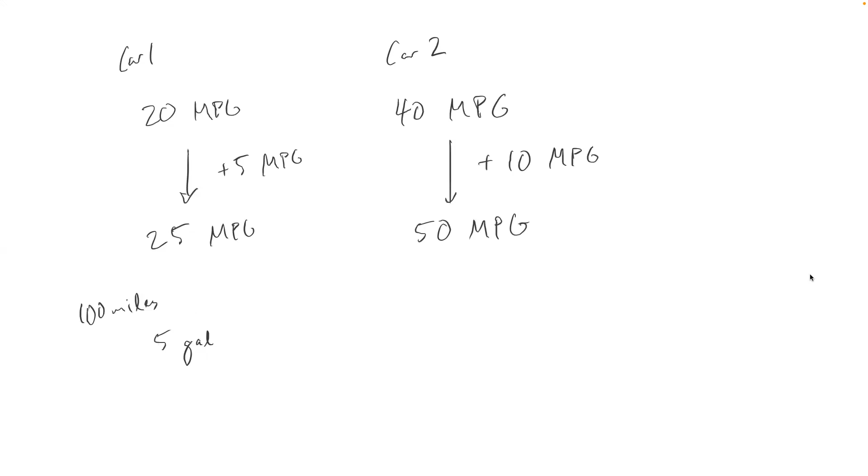Yeah, so okay, if I travel 100 miles in car 1, then it would be 5 gallons. If I traveled 100 miles in the updated version, it would be 4 gallons. So I would save 1 gallon of gas. If I went 100 miles in a 40 mpg car, it would be 2.5 gallons. And then if I went 100 miles in a 50 mpg car, it would be 2 gallons. So I would actually save 0.5 gallons.

Yeah. So what does this mean? This means switching from like a Honda Civic to a Toyota Prius is actually not as good as getting someone out of a Hummer into like a Ford F-150, right? The relative amount of emission savings from making an improvement at low MPGs is, in a very non-linear way, much better than getting someone from a good car to a really good car in terms of efficiency. So something to think about and relevant to this discussion, right?

As we think about the cars versus trucks discussion, in my mind, the efficiency and emissions requirements for trucks are substantially more important than the ones for cars. And all of this confusion, and actually people have looked at this too, asking people who are buying cars to do some of these calculations about how much money they're going to save and how much gas they're going to use. And even people who are very familiar with the field get these questions wrong all the time. And that's entirely a product of the fact that we use MPG instead of gallons per mile.

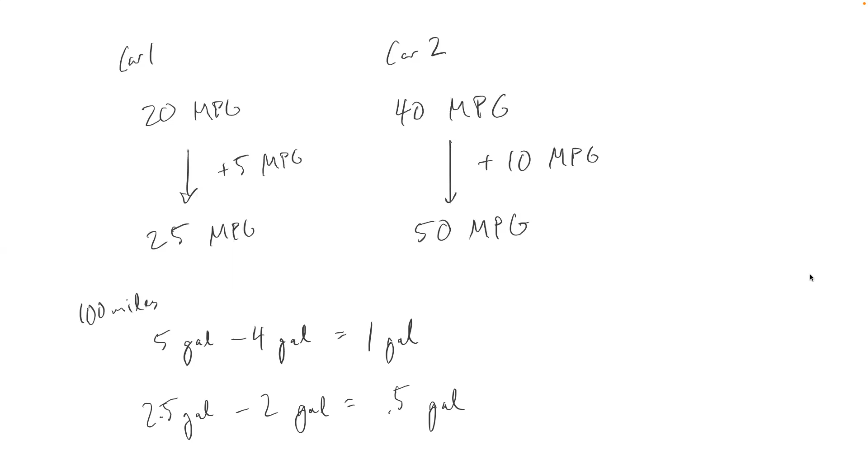Yeah. Is there a role for regulators in trying to make these numbers make more sense? I mean, is there legislation that says car makers need to advertise in gallons per mile rather than miles per gallon? No. No, yeah, it's too late for that.

But what I will say, they do try and make it easier. So in Monroney stickers, for example, which is a legislative, or is that a regulatory? No, it is a legislative requirement. So Monroney stickers, which are those pieces of paper that are plastered on the side of the car when you go to a car dealership, those are required to have certain content of information, including things like the gasoline savings in dollars, or the gasoline consumption, so that people don't have to try and figure it out themselves.

Is Europe's fuel efficiency standard in grams CO2? No. Would it be better to look in terms of carbon impacts for these things? Well, okay, wait. They have, EU. Sorry. Okay. I only said no because it's not a fuel efficiency standard; it's an emission standard. But they are the same thing, effectively. Grams CO2 per kilometer then? Yes.

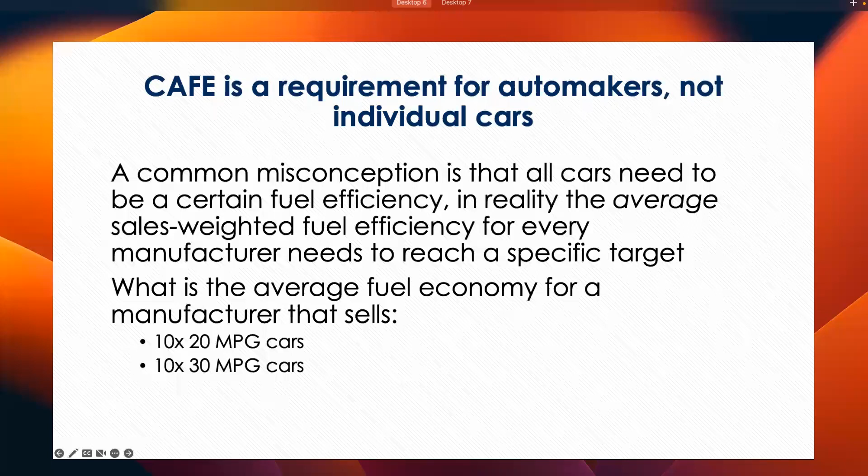Efficiency is reported typically as liters per 100 kilometers or liters per kilometer, depending on country. And then as far as regulation goes, the EU does have a set of emission standards, which is grams of CO2 per kilometer. So which would be better as a policy option if the target is carbon? It's not better or worse, right? They're exactly the same. There's a direct relationship between CO2 and MPG. So let me show you guys. If you're regulating car makers, but it makes more sense to do... Well, we're gonna get into this whole debate. Don't worry. We're gonna get there.

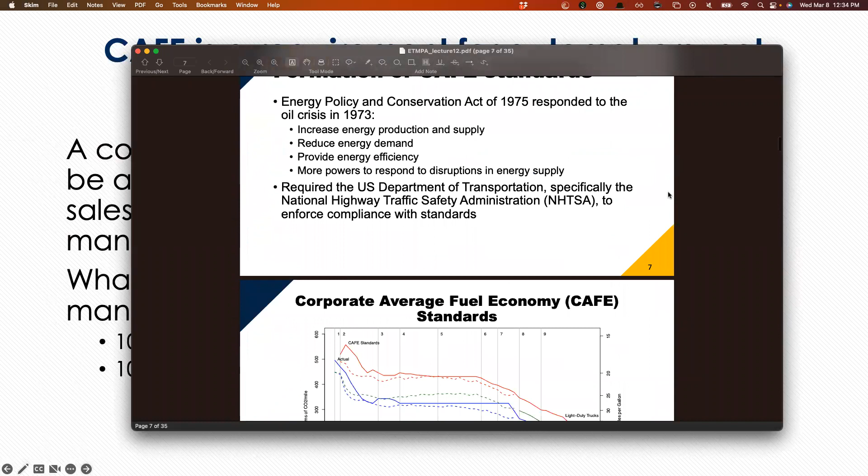So actually, I cut out, improperly, changed the whole meaning of the sentence. So this is my last year's lecture. I actually cut this out because it's a figure that I made a long time ago that's out of date. But okay, so this, yeah, because I made this in grad school, which was like a decade ago.

So you can see here, on this axis, it's grams of CO2 per mile, and on this axis is MPG, and there's a direct relationship between these two, right? So I usually say never have secondary axes unless there's an actual relationship. So in this case, it actually makes sense. And what you can see, here's this nonlinear part, right? The amount of emissions savings from 15 to 20 is the same as 20 to 30, which is the same as 30 up to 60, right? So that's why it looks like this is an inverse relationship.

This is what EVs... Well, EVs don't have an MPG, right, but you could say kilowatt... Well, okay, we're gonna get to that. Is it also non-linear as well? So EVs can be reported as kilowatt hours per mile, which would be the same as your energy over your consumption piece, or it can be miles per kilowatt hour. So I would love it if we took this opportunity to do kilowatt hours per mile, but it seems like we're reverting to miles per kilowatt hour for most things in the regulation. So we're staying with the MPG instead of GPM. Unfortunately, we had a chance, but yeah.

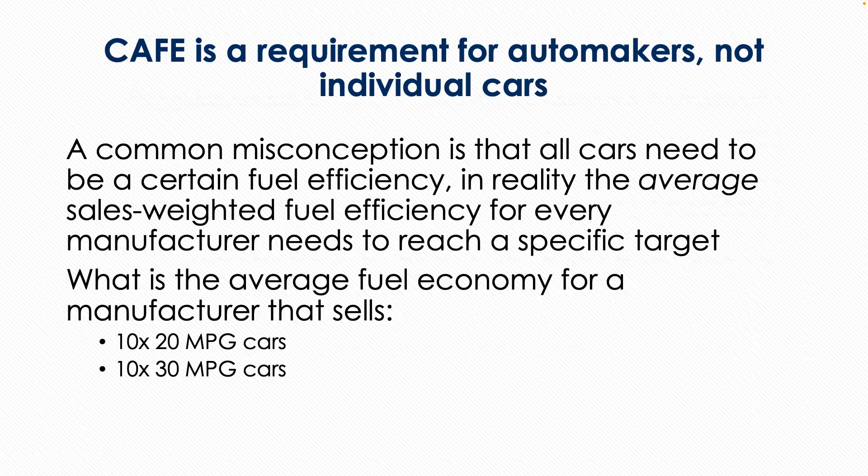Actually, it seemed that for electric vehicles, they use something like miles per gallon. Yeah, we'll talk about that. But is it linear? Well, it's the exact same thing. Exactly. It's exactly the same. Okay, so we will get to alt fuels in a bit. That was the entire topic of my graduate study. So let me talk a little bit about how it works first.

So when you comply with the regulation, you generate credits based on your target, and then you can trade them between automakers. They can also be banked. And then NHTSA can actually enforce civil penalties. So you get a penalty every year of $50, $55 per one MPG out of compliance per vehicle. In other words, if I am an automaker and I sell 1,000 cars and I am one MPG under on average, then I would have a civil penalty of about $55,000, right? So 55 times the number of cars that I sold.

So historically, prior to the latest version of CAFE, American manufacturers are generally right in compliance, year on year. A lot of Asian manufacturers are over compliance, which means they are more fuel efficient than is required, and so they generate lots of credits.

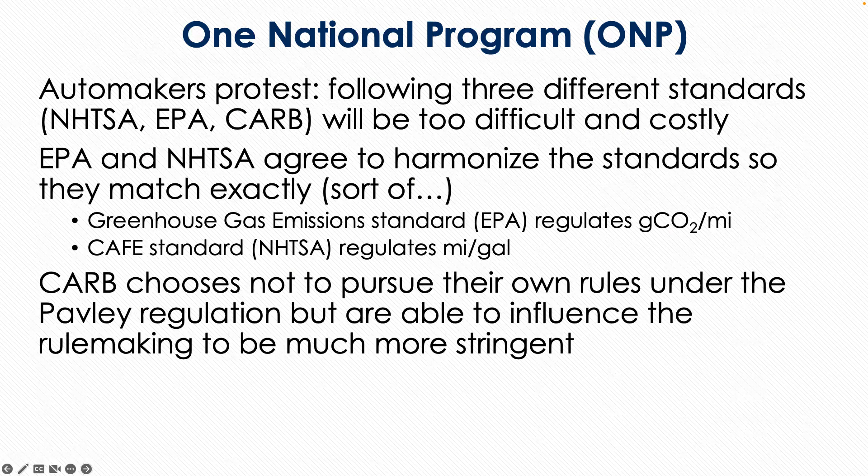I don't think I have this on the slide, so I did want to revisit your question earlier about the penalties. The type of penalties we were talking about, the $55 per MPG, that's a civil compliance penalty. EPA gets to do criminal compliance penalties. That was one of the big things when this was first coming about. EPA was doing I think $5,000 per car per day that you were out of compliance. So it was effectively like 1,000,000 times higher. So you really can't get out of compliance if you're a car company. You would rapidly go bankrupt.

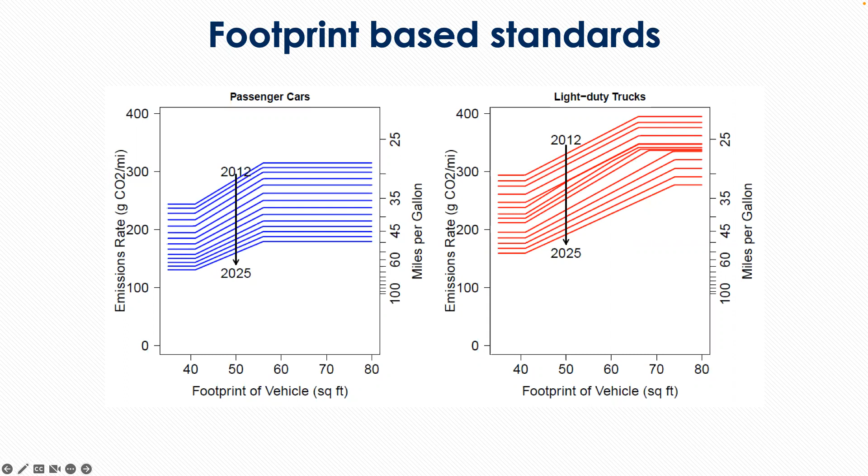Well, I guess negative ones are the ones I'm talking about, where in addition to increasing the footprint, it also incentivizes them to make the cars themselves bigger. So that was a negative consequence. But yeah, increasing the footprint itself, aside from kind of gaming the system, actually can be a good thing. Yeah. It helps with safety too, as I understand. So there are some positive outcomes. Okay.

So how do the regulatory agencies actually decide on like 55 mpg or whatever numbers associated with those lines? Because you could make it super strict and then no one would really be able to comply. So EPA had Omega and NHTSA had Volpe. These were essentially models that were used to figure out effective pathways and cost-efficient ways under budget constraints to get to a particular fuel efficiency outcome.

So they first talked to a bunch of people in automakers and in the industry, and they actually had this optimization model that iterates with market information and a vehicle choice model to figure out, for the portfolio of cars that Ford sells, how could they start implementing fuel efficiency technologies to get to specific targets? How much would that cost them? And so how can we make targets that would be difficult but feasible, right? So that's all this one big modeling exercise. Yeah.

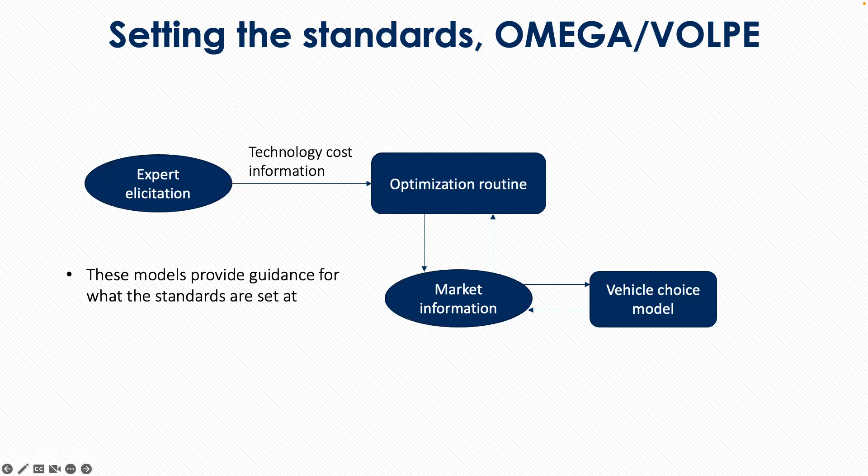Volpe. Yeah. They're separate models. No, they're not combined. They are the different agencies' respective models to look at this. Later on, the National Academies convened a bunch of experts to update that, looking at costs of different technologies to improve fuel efficiency. So these are spark ignition technologies, lubricants, engine friction reduction, all the way up to hybridization, mass reduction. So then there are these giant spreadsheets of costs and technologies that you can implement into cars to improve them.

Yeah. What is RPE average with 1.5 RPE? The fourth column after abbreviation. Oh, to the right. RPE is a scenario that they were looking at. Yeah.

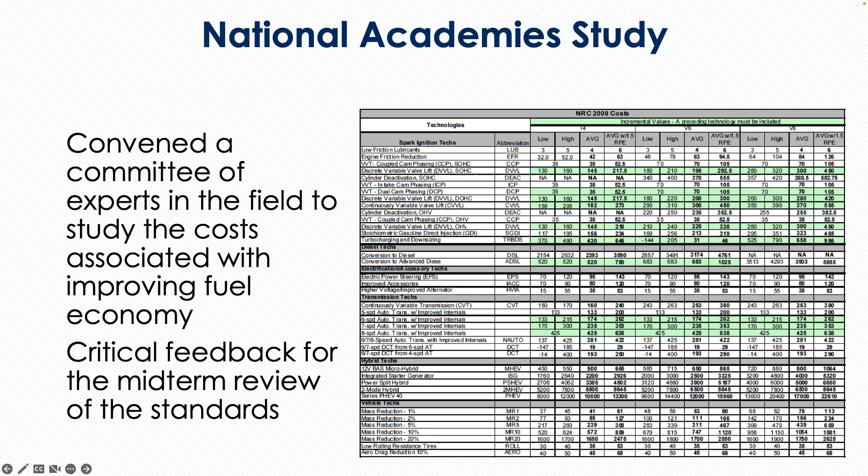Okay, so one of the things that I had studied was thinking about how CAFE would interact with other policies. No, I should say the ZEV mandate. So the idea is when these regulatory agencies say, okay, I'm going to improve fuel efficiency for these vehicles, you're first going to do low rolling resistance tires, adding lubrication, in this order, right? Because they want to do it most cost-effectively. That gets you to some kind of target, and the cost of compliance with the policy based off of that will give you some number.

So we can actually replicate their models and update them with National Academies costs, but then we can also include other policies like ZEV. What ZEV does is it says, instead of you, automaker, taking the most cost-effective pathway to improve your fuel efficiency, you have to jump to the end of that cost-effectiveness curve, because electrification, at least back then, is probably the least cost-effective thing you could do. So that changes the cost of automakers' compliance to meet the targets. And that's what this paper was doing.

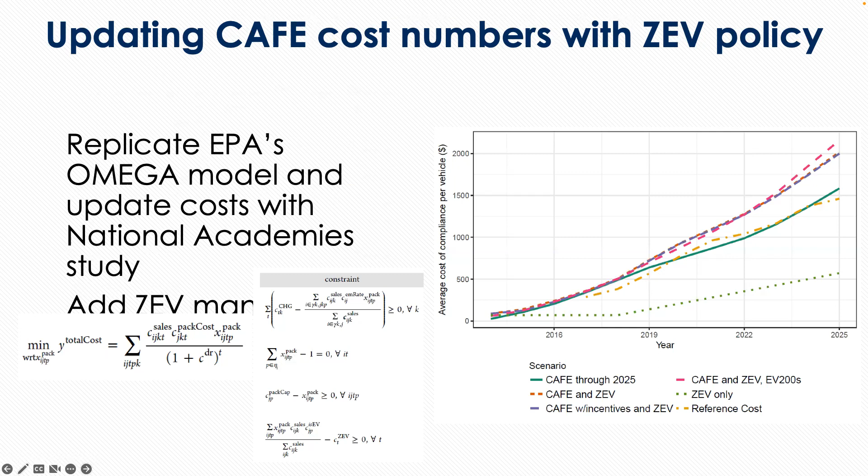Yeah. How does CAFE consider EVs? Okay, we're almost there, I promise. Okay. So yeah, let's think about that.

So fuel economy and emission rates are no longer tied together for electric vehicles, right? Because now there's an efficiency associated with the battery and the motors, so some energy gets translated into distance. But for emissions, it's not just burning a set amount of gas. It could be coming from a gas plant, a coal plant, or the electricity could be coming from solar or wind. So fundamentally, your fuel economy and emission rates are no longer tied together.

So for alternative fuel vehicles, this coupling between CAFE and EPA doesn't really make much sense anymore, right? To demonstrate that, for this Toyota Prius, I have 55 mpg. I can do 8,887 grams of CO2 divided by 55, and I will get 160 grams of CO2 per mile. So there's a direct correlation between efficiency and emissions.

But for an electric car, I have an efficiency of 0.29 kilowatt hours per mile. And then I have no idea what the emissions are, because it depends where you are, depends when you charge, and so on, right? So how does the regulatory agency deal with this? Well, they don't.

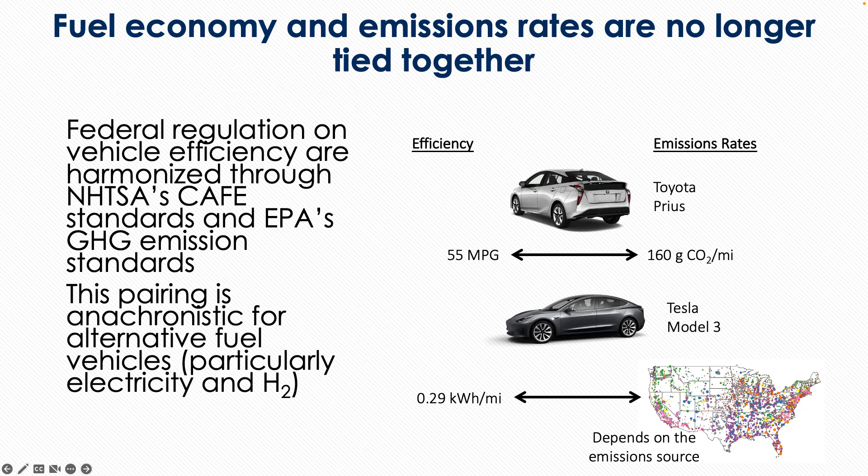Are they planning on it? I don't know. Sounds like if I were to do it, I would be pissed. Yeah. Okay, so

Current regulation doesn't really differentiate EVs, right? As we've been discussing, that can be problematic. The Ioniq was the most efficient. It's not actually being sold anymore, but it was the most efficient electric vehicle on the market. The Jaguar I-Pace was the least efficient. The fuel economy regulations treat these two cars the same, even though from a gas car equivalent, this would be like a Prius compared to a Mustang. That's how different the efficiencies are. The new one, I think it's really good.

Wouldn't consumers then drive the change if the information is transparent as to which is consuming more electrical energy per 100 miles? Wouldn't the consumer market itself make automakers put more efficient EVs out there, or is it not enough? There's a saying: consumers don't know what cars they want. Automakers know what cars consumers want. How is that?

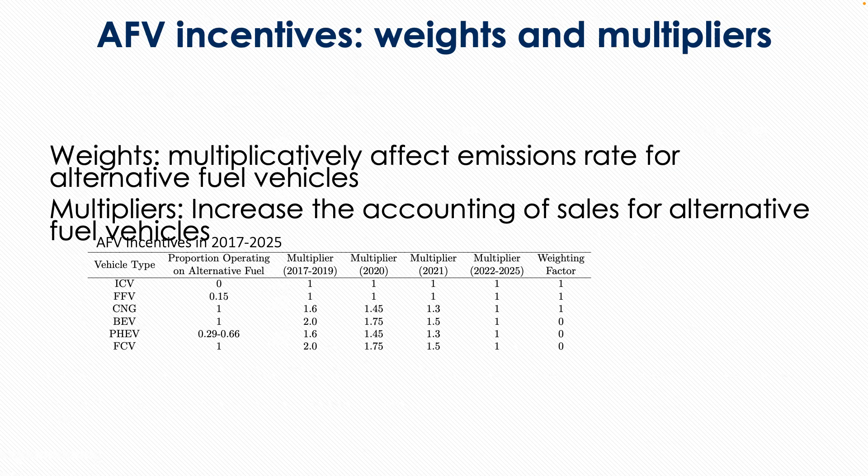But because of these weights and multipliers, it means the clean car that I sell actually looks a lot cleaner than it actually is, right? So this was another modeling study that I had done. And so this is basically saying, if this is my standard, if I sell a Chevy Volt as Chevy or as GM, I'm then allowed to sell a dirty car.

But actually, if this is the true emissions of my car, because of the weights and the multipliers the way it's counted is actually this, which lets me sell an even dirtier car. And so all of this extra stuff is extra emissions that are happening because of the weights and multipliers. And so from a 55 mpg, you're not actually going to be getting that. It's going to be slightly less than that.

Is regulating models a feasible thing? You cannot make a car model that is under 15 mpg. I mean, yeah, but I think that would be a really not good way. There's a lot of reasons why you wouldn't want to do something like that, right? Because then you're only regulating their worst car, and all the other cars wouldn't have an incentive to improve. Fewer super clean cars, more close to the line.

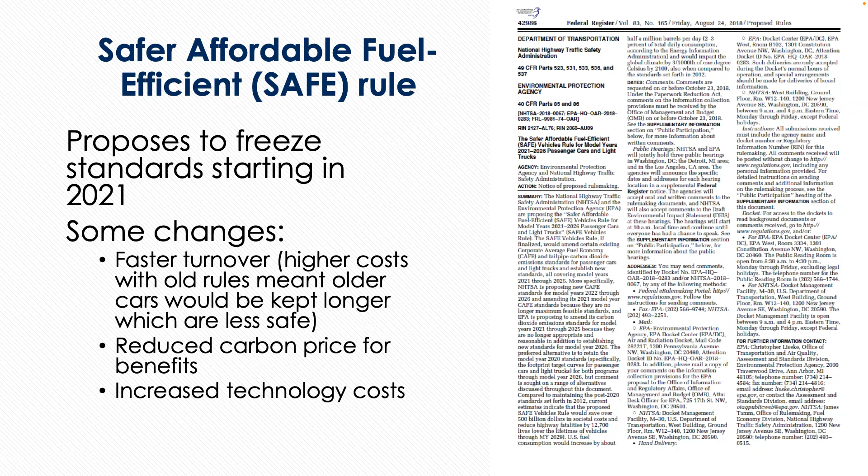There's a lot of modeling and research in response, right? So this was one of the big papers that came out, where a bunch of economists got together and said the Trump SAFE rule analysis is completely bogus for all of these reasons. They said that they way overstated things like safety costs. So there was a whole bunch of political stuff that started to happen. What you were mentioning is in California, which had the ability to do their own set of regulations. So they said, all right, if you're gonna mess around at the federal level, we're gonna start doing our own thing again.

And then the whole thing was gonna be this big fight, because the Trump administration would say, good luck getting a waiver, because you need a waiver to do your emission standards. And then CARB said, aha, we preempted you, because we talked to car companies who opted into joining our standards voluntarily. So that's what you're referring to. Half the automakers said, we're just gonna do whatever California says voluntarily so there isn't any issue with the waiver thing. And the other half said, no, we're gonna do what Trump wants.

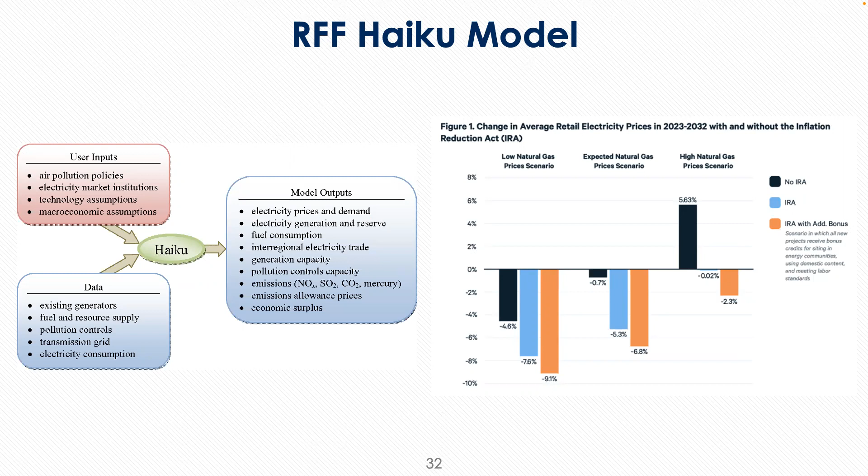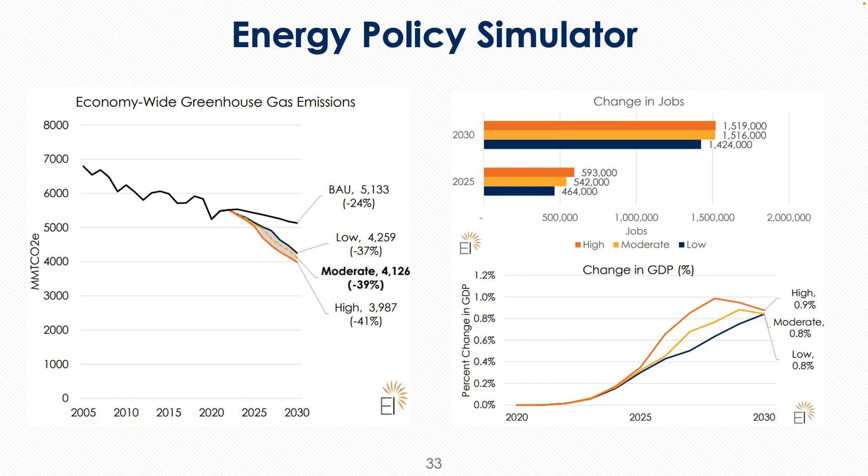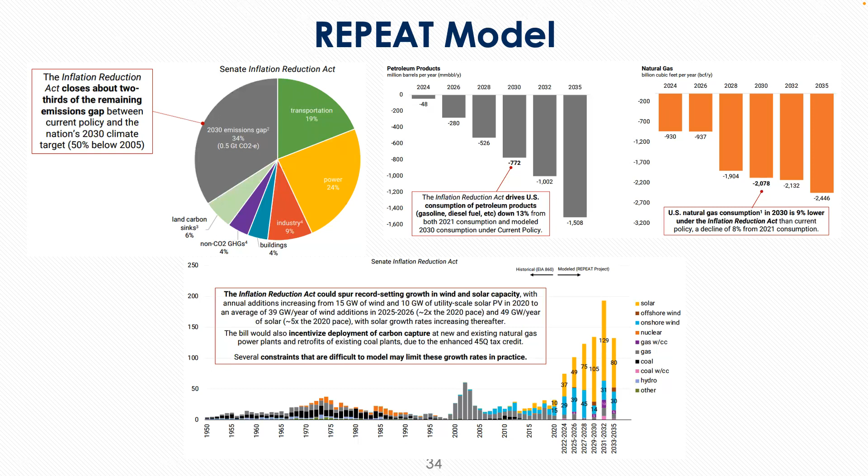Okay, so all of that having been said, right, there's a lot of room for contribution, especially in the policy space of modeling, right? And it doesn't have to be this thing where you are just making these models and publishing papers, right? There is opportunity for interaction between real stakeholders and policymakers to understand outcomes from these models that really would be difficult to get at in any other way. So it's important to apply a lot of this thinking and analysis to these systems, the transportation and energy sectors.

Yeah, and so hopefully you guys have seen some nice examples of models that apply a lot of these principles and methods and techniques in terms of what we've learned in the class, right, to really sort of relevant application of these things in policy. So economic analysis obviously is going to be really important, thinking about costs and benefits. And so that rolls in monetary analysis, discounting, and all of these other financing things that we've talked about. And that's kind of closely related to decision making.